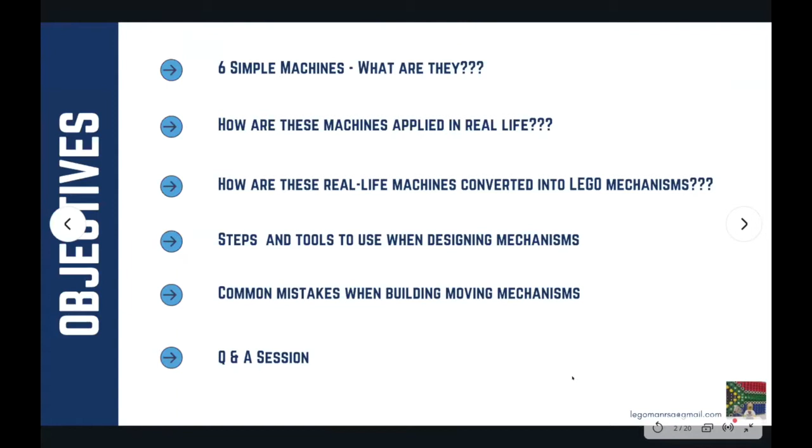So our topics today: we're going to discuss the 6 simple machines and what they are, especially in the world of physics. We're going to discuss how these machines get applied in real life. Where do we see these simple machines?

How do we convert these real life mechanisms into Lego mechanisms that move or create movement in our builds? How do we plan for it? What type of mechanisms are available? Then we're going to talk about steps and tools to use when designing mechanisms, how to make it easier and less intimidating.

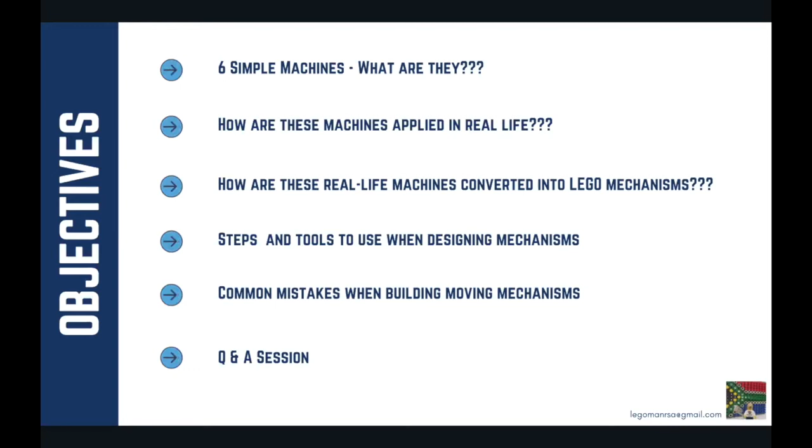I'm also going to discuss a couple of things on common mistakes when building moving mechanisms, things that I've seen people do, reasons why movement fails or why it doesn't work as well as you would have liked. And then if anybody's got any questions, we will discuss some questions and answers if everybody's interested to do that.

So what is a simple machine? A simple machine is a mechanism or a mechanical device that changes the direction or the magnitude of a force. Now, you have many different types of forces in nature. You've got gravity, wind forces, physical pushing forces, mechanical forces from engines. Now, if you have a mechanism that changes the direction or transfers that force into another different mechanism, it creates a machine.

In physics, there are 6 classic simple machines, sort of defined by the Renaissance scientists. These are a lever, the wheel and the axle. The lever creates leverage, wheel and axle creates movement around a single point and transfers loads. Pulleys also change the direction of a force and give you mechanical advantages. You get an inclined plane that changes the altitude of an object, or gives you gravity advantages, or gives you a braking force if you go up against an inclined plane.

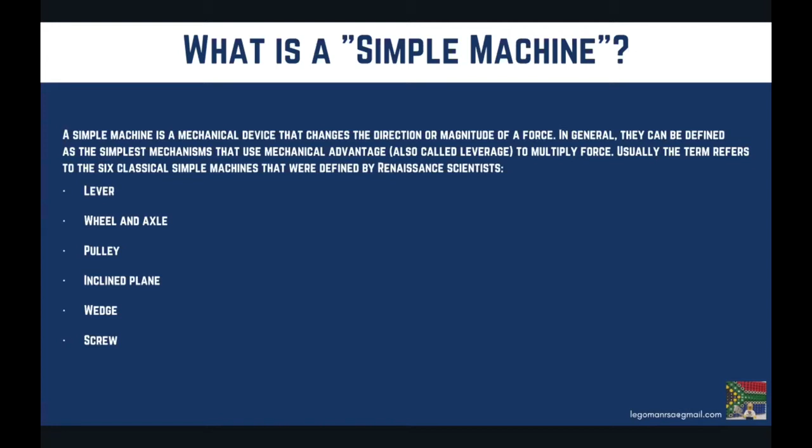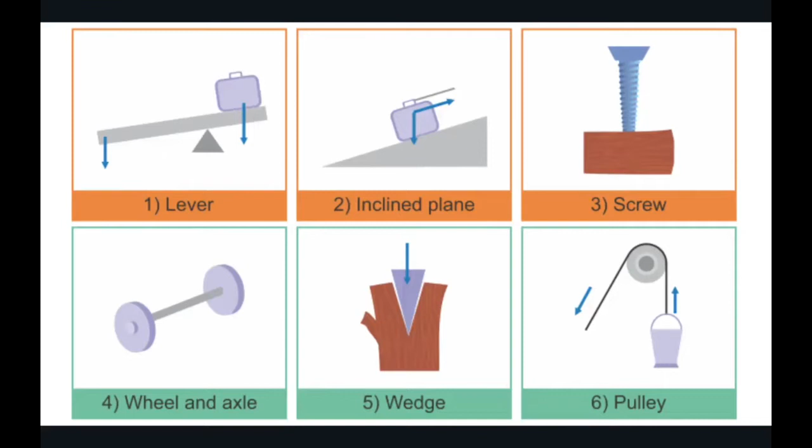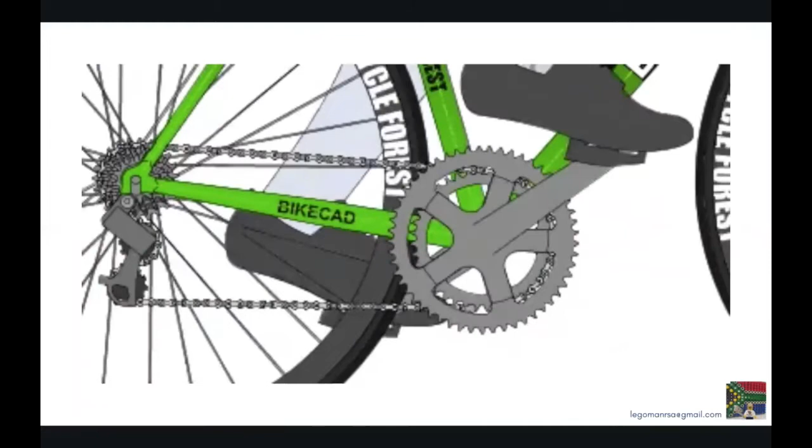We're going to look first, just as the basic to understand the physics of movement, at an example of a mechanism that we're all familiar with: a bicycle. Now, a bicycle is made up of a combination of quite a few of these different simple machines. First of all, you have the wheel that refers to the basic machine of a wheel and an axle. So you've got a wheel that turns around a center point, and that allows the bicycle to move forward over the terrain at a reduced friction.

Then you also have the gear mechanisms, the pedals. The gear mechanism is another example of a more advanced wheel, and we'll discuss the gear a little bit further now. The pedals are an example of the lever that transfers the force of the person onto the wheel or the gear, the ring gear itself. You have brake levers that again are an example of transferring force through the brake system onto the wheels. You've got the handlebar, and that changes the direction of the bike. So combining these different simple mechanisms makes up a more complicated machine.

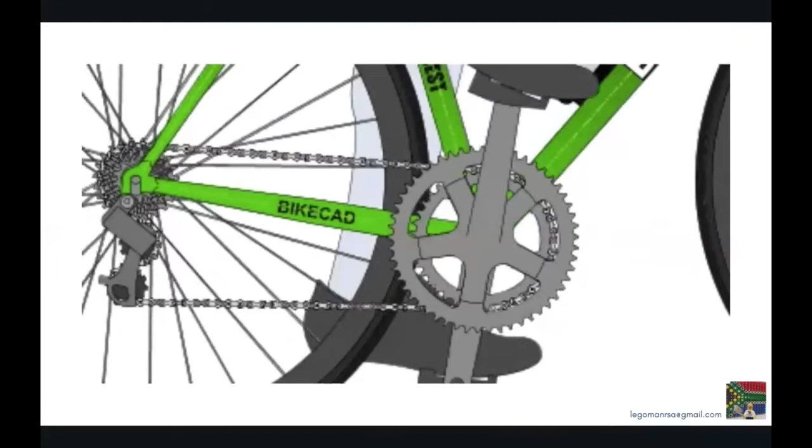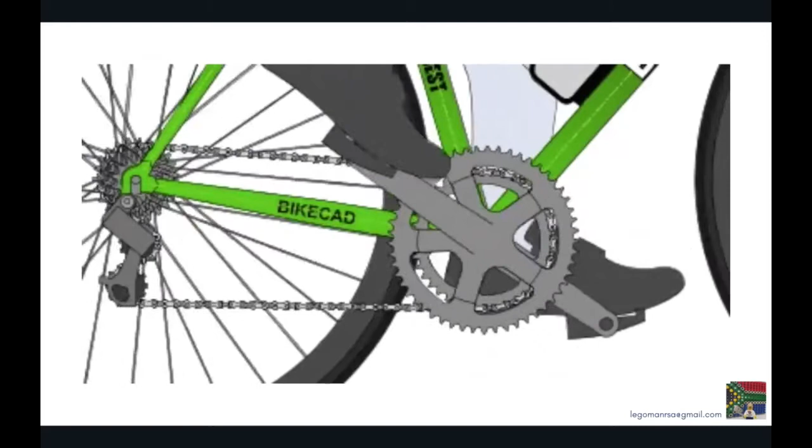So if we look at the gear a little bit closer, it is a wheel that moves again around a center axle, but the gear itself is a little bit more advanced. I think it's on my next slide. The little teeth of the gear are actually little levers that force the chain around the ring gear. So again, that's a form of leverage combined with a wheel that creates a more advanced machine. Going back to the previous slide, the lever itself again is transferring the force through the wheel, through the chain to the back wheel, a combination of different machines. But why are we talking physics?

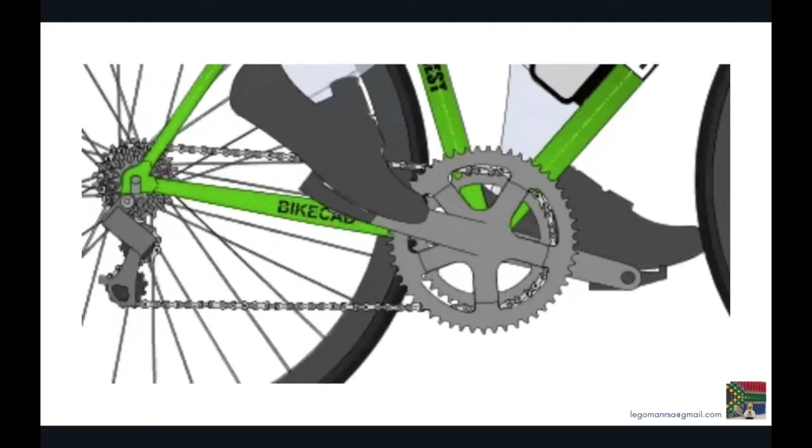You know, when we actually want to talk about building Lego. Now, it's just to understand, just to explain, because it forms part of the thought process when planning and designing a moving mechanism. Because at the end of the day, there are some mechanics and physics involved. I mean, we stay on Earth. There is gravity involved. We need to plan it properly to implement the right mechanism.

Now, in our life, we have many different mechanisms around us that can inspire your thought process. I mean, we've got analog clocks, we've got kitchen appliances, we've got electric toothbrushes that have got a gear system in it, even the flushing mechanism in your toilet. I don't know how many people have actually removed the lid in your toilet bowl to actually see what that mechanism looks like. But that is a more advanced version of the lever.

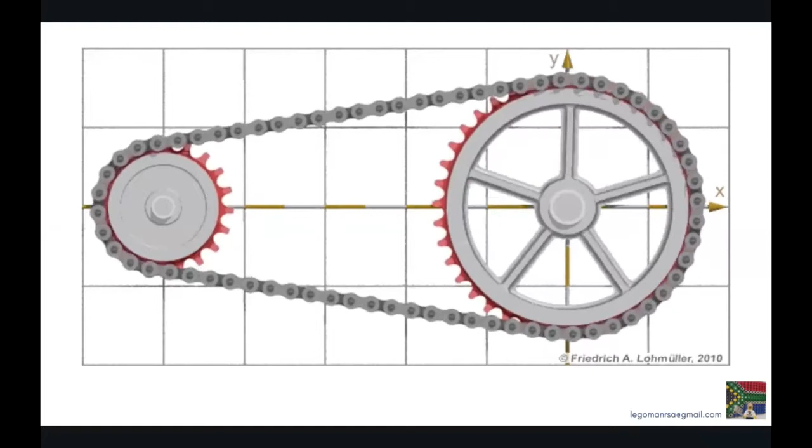The handle on the outside transfers the force to the mechanism on the inside of the toilet, and it releases the water to flush a toilet. Now, that again is a simple mechanism, but it might be something that you can implement or initiate the idea of a mechanism into your build. So you want to look at things around you when you start planning something, to be inspired by machines around you. And we've got these simple machines around us everywhere to start building a moving mechanism into your Lego build.

So again, the question: so why are we getting a physics class when you want to talk about Lego? So the simple answer is that when you want to make Lego move, you need to understand the basics about physics. Everything, there is an input force that initiates the movement, and that force gets transferred through a mechanism to your end result, the part that you want to move or create movement for. So we need to understand the type of force that'll make the element move in the direction or the way that you want it to move.

I mean, do you want the part to spin around? Do you want the part to move up and down vertically? Do you want to be able to move it in a horizontal direction? And you need to consider how fast or how slow do you want this mechanism to turn or to move? And then how strong does the force need to be to move that part that you want to move?

If you are building a very small MOC with a very small part that is moving, the force that you need to turn that little part is not very big. But if you are building something much bigger, you need to create a bigger force to transfer that initiating force to the actual part that you want to make turn.

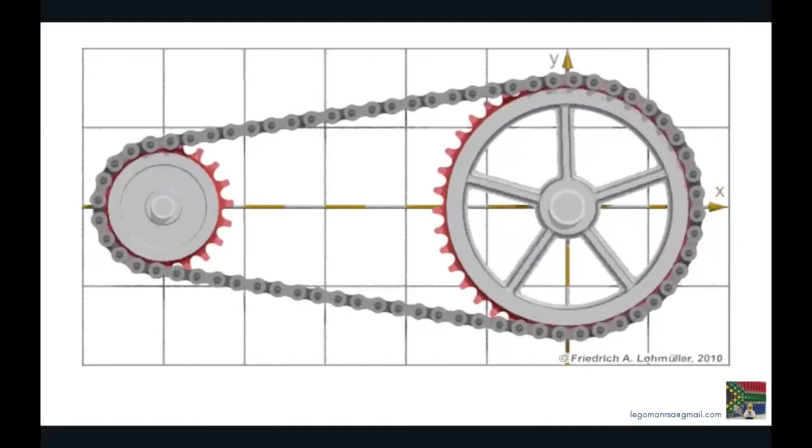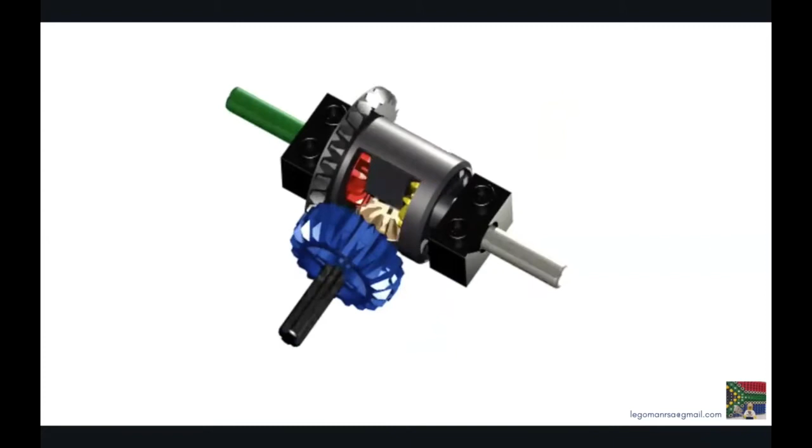Sorry, these are a couple of examples of moving mechanisms, before I get to the planning. These are just some gears driving another gear. This is an example of gears moving through a differential that changes the direction of an input force into another direction at a 90-degree angle. Here we've got a cam gear mechanism that works on a timing. So it changes your move at a 90-degree interval on this specific build.

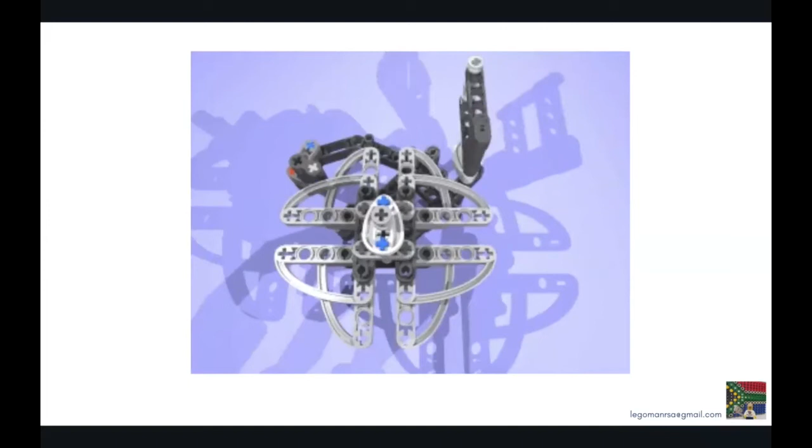And the thing is, because there are so many different ways of doing it, it's very difficult to explain to you that there's only one way of doing this. And we all know with Lego, there's not just one way. There are many, many ways you can implement movement, many ways to drive it, many directions it can come in from. And that's where you need to really understand first what you want to do. And that is where the planning part becomes essential.

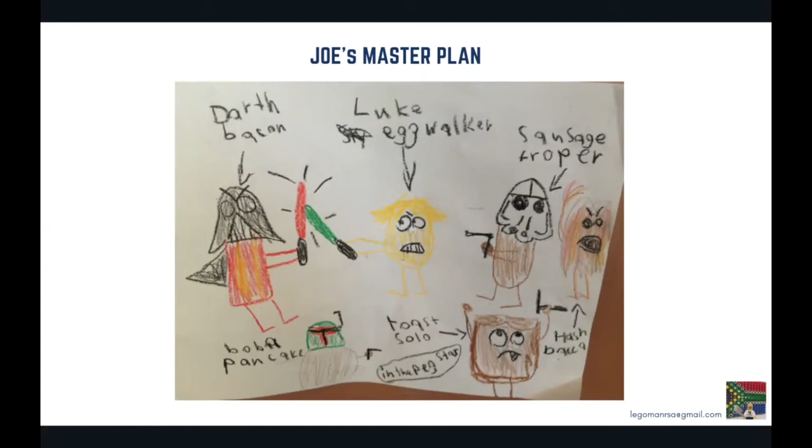Now, prototyping can be something as simple as building a very simple layout that sort of resembles the size of what you want to build. I generally build my prototypes in odd colors. Now, this is maybe a tip you can use. I tend to build it in colors that I'm not planning to use in my actual MOC. Now, the reason for that is when you build a prototype, you develop a mechanism or a structure, and as you build it, you might want to fine tune it.

And so when you start building more complex prototypes, you end up using quite a lot of your parts. And if you build it in the color that you're going to actually end up using in your MOC, you might not have enough parts in that color to actually build your MOC. And you have to start taking apart your prototype. And when it's a complicated prototype, and if you haven't drawn it in Studio or LDD, you start losing the plan that you did because you don't have the example in front of you anymore. Now, on a simple build, it's not that complicated, but on some of the more complicated builds that I tend to end up building, it's not that simple just to build it from memory again.

When you practice and you build certain mechanisms, you will find that, the same as what Wayne and Paul do, they have got certain sort of templates and mechanisms or systems that they use in almost all their builds, so they have a general idea of, listen, how does this mechanism or this method or this technique work? I know how it works. This is how I implement it in my next MOC.

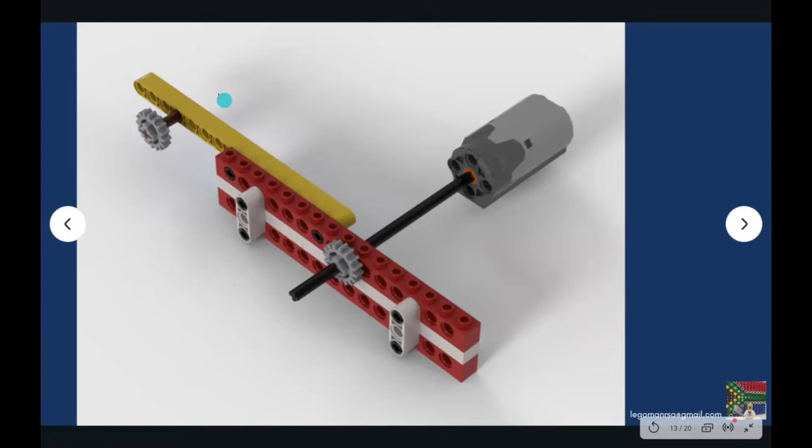So just quickly a little bit on scale. I've had a couple of people ask me in the past, how do I determine the scale that we build something in? Now, you need to think about your build. There are certain aspects of your build that you need to consider, something that is true to the model, that represents the model in real life. So if you are building a big front end loader, for instance, one of the biggest components on the front end loader is either the shovel in the front or its wheels. Now, generally in Lego, we only have certain different sizes of wheels. And it's not an easy thing to build, especially if you want to make the model playable. You can build wheels, but it's not very strong or sturdy. So the moment you start moving the mechanism or the build around, the parts will fall apart. So you are sort of forced to use the wheels in any type of vehicle.

So you need to go and measure or find a drawing that tells you, this is the size of the wheel in real life, and then go and measure the size of the wheel that you have and say, okay, this wheel is 3 centimeters big in the Lego scale, but it is 120 centimeters big in real life. So you take the 120 centimeters and you divide it by the 3, and you get 1 to 40. So you know your scale is 1 to 40.

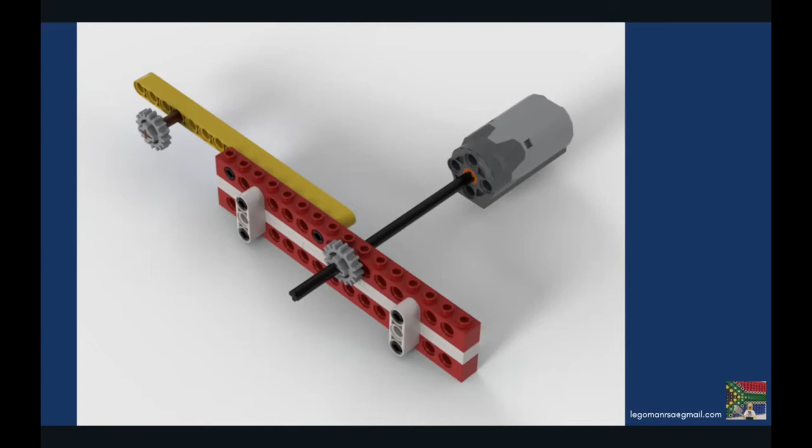Then another fantastic tool is the digital software that we have, either LDD or Stud.io. I also used to draw in LDD, and a couple of years ago I moved over to Stud.io. I just found that because of the scale and the number of bricks that I end up having in my build, the processing power of Stud.io was just a little bit better. The renders are very professional and in high quality, and it also helps you to generate instructions.

So when you build these type of mechanisms, it's always nice to create your steps on the side. I'm not going to go into too much detail of that now, but as you build along, so that even for yourself at the end of the day, when you have to recreate this in real life, you don't have to go and pull this thing apart digitally.

You can hide certain parts, but you need to plan the process of how do I put this together, because you can take one of these parts and literally pull it through something else, but in real life you cannot necessarily do that. Certain parts interact with each other in a certain way, so you need to plan that part as well when you're using digital software.

And the other thing that I've found is something you need to consider is you cannot always feel the structure strength or see what the structure strength will be when you're building digitally. It'll look nice, but the moment you build it in real life, it's very floppy or it's not strong enough. And so you need to take that into consideration as well.

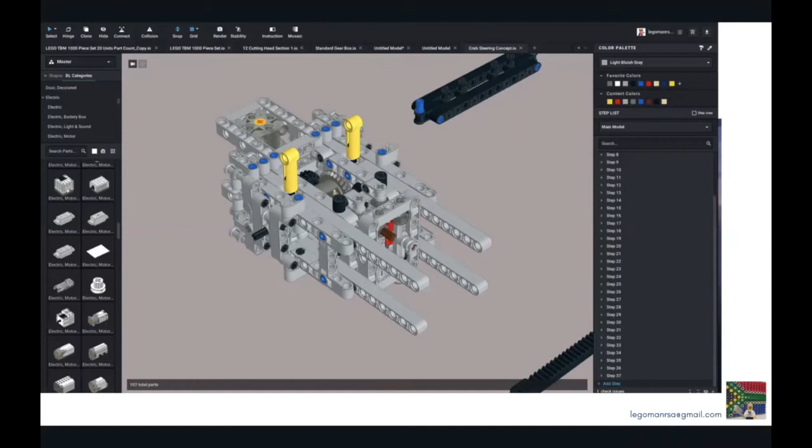So some of the biggest mistakes that people make when they build these type of designs or mechanisms, is that you fail to plan first, and then you don't support your structure properly. And we've seen that a couple of times, and I've specifically noticed it in some of the guys' builds in the latest season of Lego Masters in Australia.

Some of the guys built these awesome MOCs and decided they want to make a portion of it rotate or lift up and down, and they didn't put enough planning into their design. And when they built the moving mechanism, it was very flimsy, so it pulled apart very easily.

And for instance, on this example, if this was all that was supporting this mechanism, eventually this gear will work itself off the axle, and the force created between these two gears will actually pull apart these two bricks from each other, and that'll stop the gears from meshing properly, and your movement will stop.

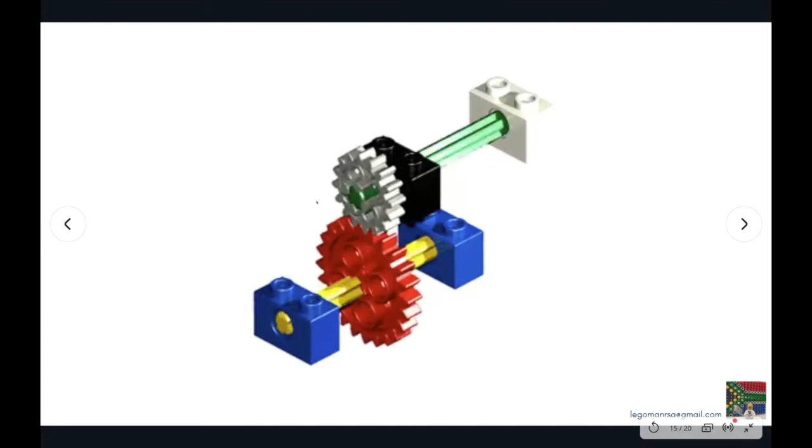I've got an example here of one of my gearboxes that we use as a standard in some of our GBC modules, and this has proven itself very reliable. You can literally see every single gear is supported from every side. The gear cannot move in any direction. It is literally surrounded by structure. Every open space on the axle is filled with something, so that the gear itself cannot move anywhere.

The structure itself is designed in such a way that these two gears cannot pull apart because it's connected in one Technic lift arm, and the two sides cannot pull apart because it's held together by this supporting structure on the side. So when you're designing a mechanism like that, try and design it as solid as possible. Support the axles and the gears on both sides, and test it.

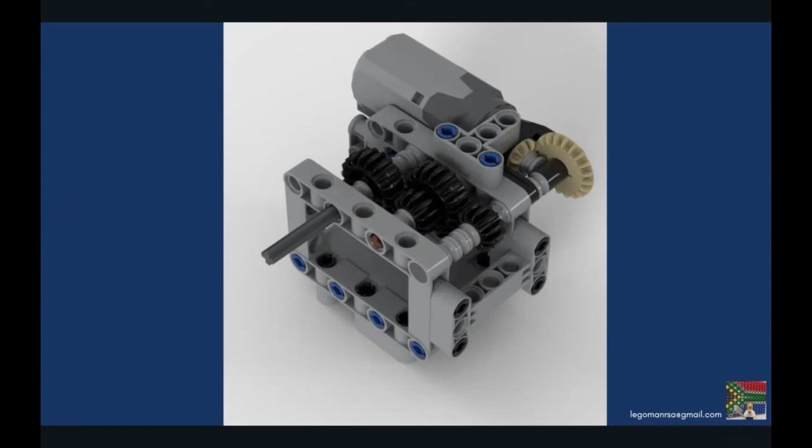That is something else that creates fails. You need to test your mechanism. Run it for a couple of minutes at first, then try and run it for a couple of hours and see what it does. Does it start pulling apart? Try and build your mechanism so that there's the least amount of friction possible. Don't squash the bushes too tight against the structure. That'll create extra friction.

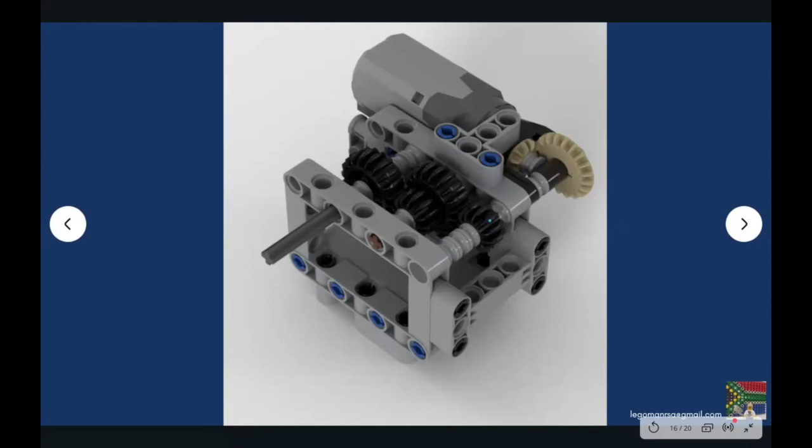Try and move the gears away from the side of the structure, because these gears actually touch the side of the structure a little bit and cause extra friction. So if you can move these gears away from the structure that's supporting it, you remove that friction immediately, and you'll have a very reliable gearbox or mechanism that'll not give you any problems.

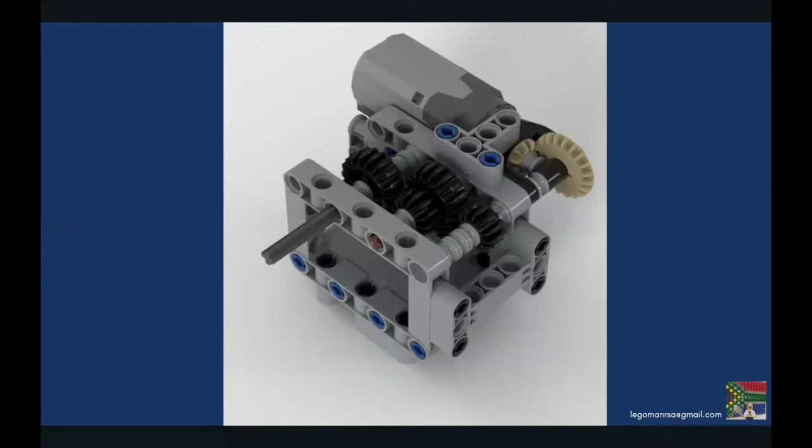But planning, build prototypes, make sure you support your structure correctly, and test it. Those are the four main aspects of designing a mechanism into your build. So just a couple of quick things on gear ratios. You can find quite a lot of information. I think this table was actually created by a very well-known Technic MOC builder, Sariel.

It gives you the relation between the different gear types and gear sizes. If you were to combine the same gear, it'll give you a 1-to-1 ratio. So that means if you put one rotation into the driver gear, you'll get one rotation out in the follower gear.

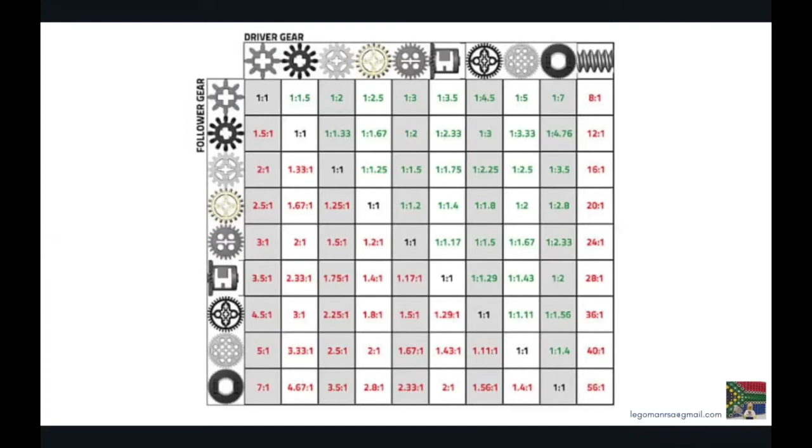If, for instance, you use this gear to the smaller one, one rotation of this gear will give you 3 rotations of the smaller gear. Now, again, this is not something that you need to try and calculate yourself. There are tools available. Again, Sariel made some very nice apps that we can download.

I'm not exactly sure. The last time I checked, it wasn't available on the App Store for the Apple iPhones, but it's available on all the Android devices. So there's an app that calculates gear ratios for you. You can literally select your driver gear and your follower gear, and it'll tell you the gear ratio that you need. And I'll show you an example.

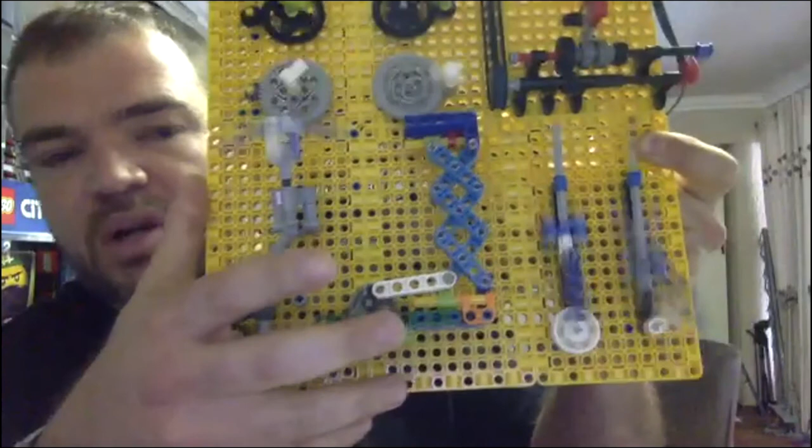He's also got an example of a lifting mechanism here that works on a lever and a scissor lift. And then on the side here, he's got a couple examples of a cam mechanism, or like a locomotive piston, that will give you up and down movement. Now again, you can see they're moving fairly fast, but you can reduce that speed dramatically by implementing a gearbox.

There's a mechanism that he built for us that shows side-to-side movement, and that side-to-side movement actually activates a gear to only turn at certain times. So that might be a type of movement function that you would like in your build. That is an example of how gear ratios influence your build.

And you can play around with that, and also you can use different motors that have different sizes. Lego makes quite a few different size motors that'll either give you different speeds or different torque values. And again, Cyril made an awesome app with the Lego motor specs, and it'll give you exactly your RPM, the size of the motor, the type of torque that you can get out of it, a very, very helpful tool when designing a build.

You can also change speed by the different control mechanisms that we have. Like, for instance, if you use a speed control or remote control through an infrared sensor, you can adjust the speed. That's actually one of the simplest ways to control your speed or even the direction you want your build or your movement to turn.